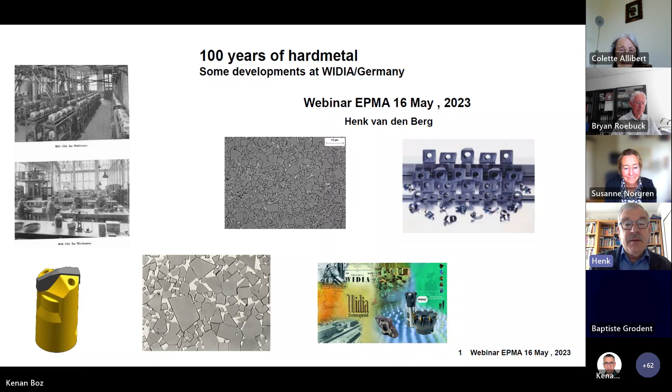It all started, next slide please Ken, with the Karl Schröter patent on March 30th, 1923, which was a common work in the Osram institutes in Berlin. Also, Mr. Skaupy was involved. That name will come back a couple of times.

And after using this material in drawing dies for making filaments, it seems that Osram was no more interested in doing more research on applications. So Krupp acquired this patent by the end of 1925 and started manufacturing in 1926. You see a first structure of the Widia N, tungsten carbide 6% cobalt grade, which is still today one of the most used compositions.

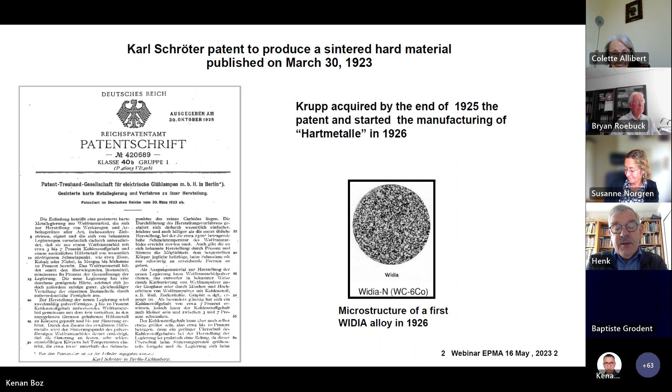And in the next slide please, Ken. Krupp was very good in marketing. Alfred Krupp already had a huge marketing department starting in the 1850s. And Krupp decided the baby should have a very good name.

And from that, the success started. Next slide please. It started all in the basement of the Krupp laboratories, not far away from the production site, which we will see later on.

And it is very interesting that at the same time, the company Walter, Mr. Walter, started production. But looking at the files in the historical archives of Krupp, he had to make an agreement. And it's very funny to see that Walter then, for years in their catalogs, had a special page at the end stating their products are made out of hard metal blanks from Widia.

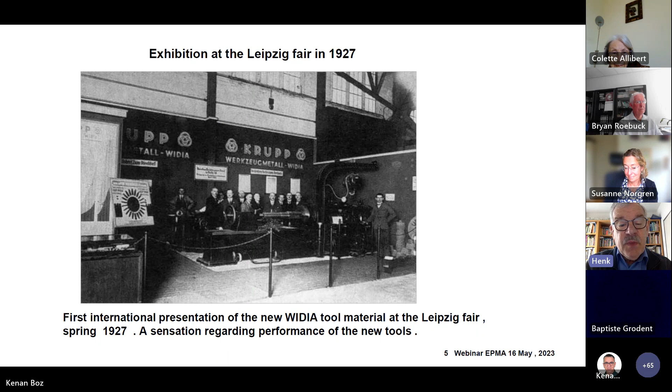Even now today, the application of cemented carbide on the tools, which are of course nowadays quite complicated, the key point is training the people who are at the machine. And that was a success in Germany, especially in Europe, in those days.

When you read the booklet where Dr. Ammann is visiting the United States in the years 1935, 1936 to see why carbide is not having a breakthrough there, it was this kind of untrained people that very, very often meant the cemented carbide tools used in the US were just breaking because the application was done in the wrong way.

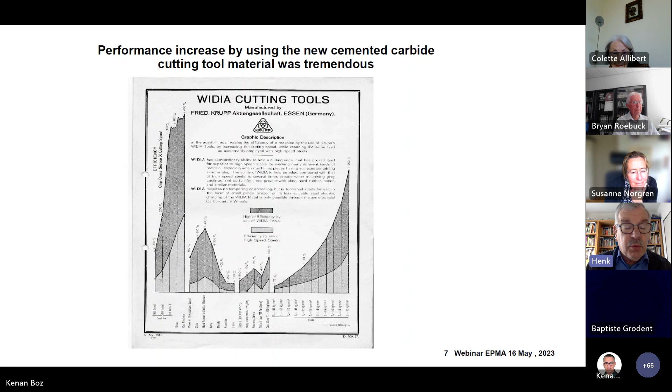Next slide, please. Again, here you see the very, very broad application guides that they gave directly after introducing a new product, a new material. Here the Widia X8, a new grade. And very important, every time in these brochures was the application with pictures, with a layout, how to use it, how to approach the part you want to machine, and even how a machine has to be constructed regarding stability and the clamping of the parts.

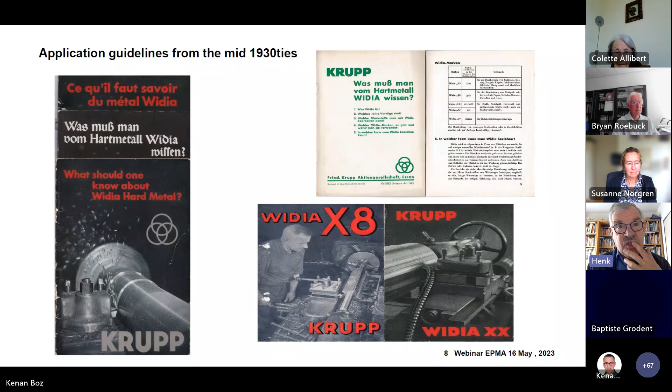The next slide, please. This is quite interesting when we talk about pricing, because it's really a very good business. Although in machining today only 4% of the costs are the cutting tool, the pricing, the usage was from the beginning very, very important.

And it's really amazing that in the mid-30s it was $45 per pound, because it was sold per weight in those days. In the United States, as you can see, it was around $50 per pound in 1928, sold by General Electric under the name Carboloy. Between the 30s and '36 it was $450 per pound. It was amazing what Herbert Ammann saw in those days. And after that, it came back to about $100 per pound. So it was really more expensive in the United States in those days, as they stated, than gold.

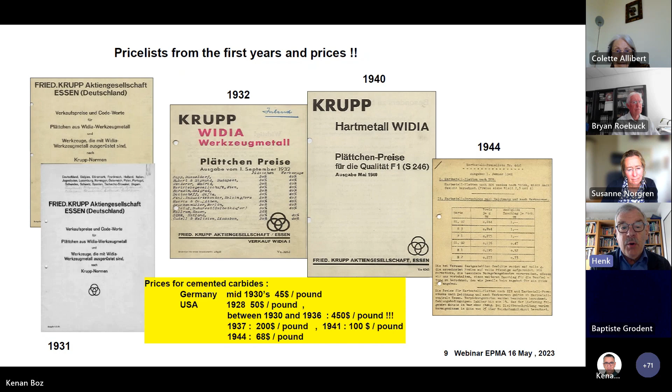But also here you can see again that this pricing, which was done in those days by Krupp and the company Zapp in Düsseldorf, was worldwide done per kilogram, per kilogram. The next slide, please.

This is the picture of the plant in 1934. It was taken from the first handbook of hard metals given in those days, published. In that factory, really the usage and the tonnage was dramatically increased in those days, because the production of hard metal was now really under control, and a lot of licenses were given to other companies. In those early days, it was really worldwide the breakthrough.

Of course, after World War II the production was stopped for one to two years, but very soon it was allowed again from the British council in those days in North Rhine-Westphalia that Widia could restart, but they had to write down - and that is a very interesting booklet, the so-called hard metal Bible - where Mr. Skaupy had to tell everything, how to make hard metal, all the grades, all the machines, all the equipment written down. After that, of course, the German hard metal industry, but the worldwide hard metal industry, was growing very fast.

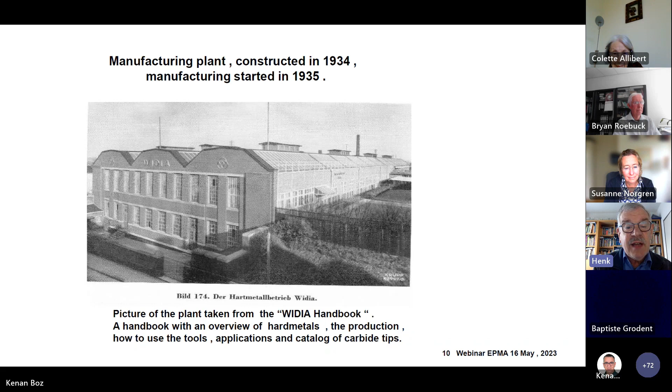And finally, throwaway tips were introduced in the 50s, as I said. But Widia pushed very hard and said, well, we do not throw away our inserts, and the name was changed to indexable inserts.

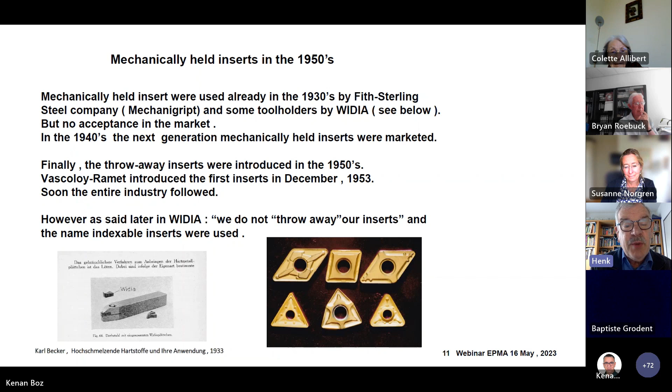The next breakthrough came in the 1960s, mid-60s. The first announcements were made in Werkstatt und Betrieb by Professor Rüdiger. However, this was a heat treatment of cemented carbides where a top layer was produced by sintering, which was then called a coating. But the first real coatings came to market in 1969, a simple titanium carbide coating, followed by a titanium carbide titanium nitride coating.

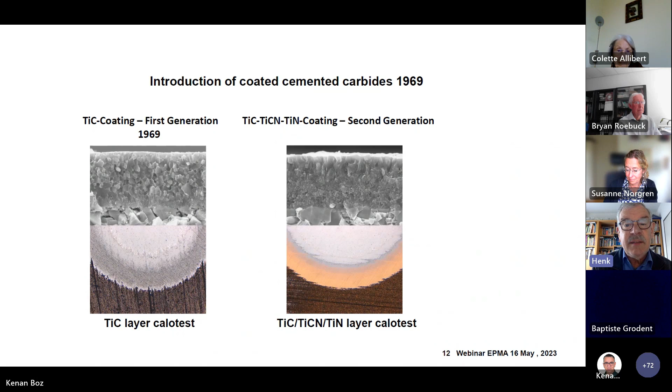The very broad introduction of aluminum oxide coatings was a breakthrough to go to much higher cutting speeds, broadly introduced in those days by Sandvik, with a titanium carbide aluminum oxide coating, followed by multi-layer coatings.

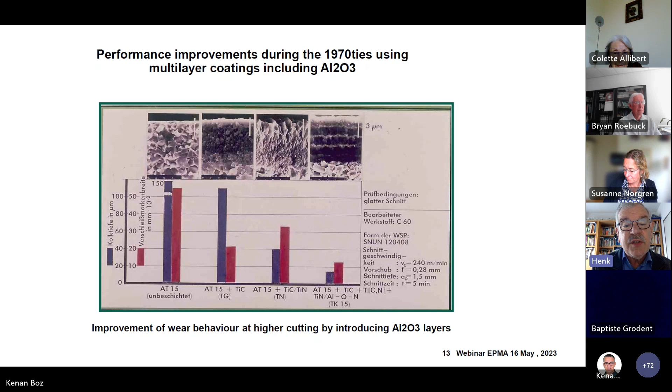Nowadays, the approach is to make a really good performing cutting tool, because we don't sell a coating, we don't sell a hard metal combination, we sell a cutting tool, a cutting edge, in round tools, inserts, or wear parts. It's the substrate, very important. It's the cutting edge, it's the coating, it's the chip breaker geometry, the design, how to lead the chip out of the workpiece being machined.

Later on, in the beginning of the 2000s, 2001, stress was introduced in CVD. It was known from PVD that you have compressive stress, and we also always had tensile stress in coatings, and we found out how to change that by blasting processes, by post-coat treatments. Very important, especially pushed by Sandvik, was the texture management of the aluminum oxide layers, which gives very good improvements in machining performance.

These five components are very important to make a very good cutting tool.

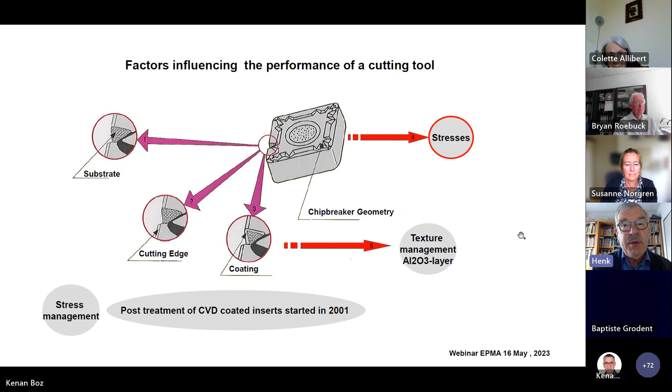Looking to the future, we will have change. It's ongoing already in aerospace and automotive. We go to electro cars, which will of course have an impact on the number of machining components. The introduction of 3D printing will also change machining.

We will have more finishing to finish the 3D parts. We have to use more recycling because resource availability is limited for sustainability. There will be a strong focus, already ongoing, on increasing productivity and optimal application, with optimizations in ceramics, hard metals, geometry, coatings, texture of coatings, and stresses of coatings.

So there is a lot of work to do: improve production technologies like powder processing, pressing, extrusion, sintering, coating, and of course 3D printing. We have to go faster to market.

And of course, very important today, as you can read in every newspaper, in every market, but also in our industry, is the development of better networking to support talent development needed not only in research and development, but also skilled co-workers in production. You really need skilled co-workers to do the sintering and the pressing, etc.

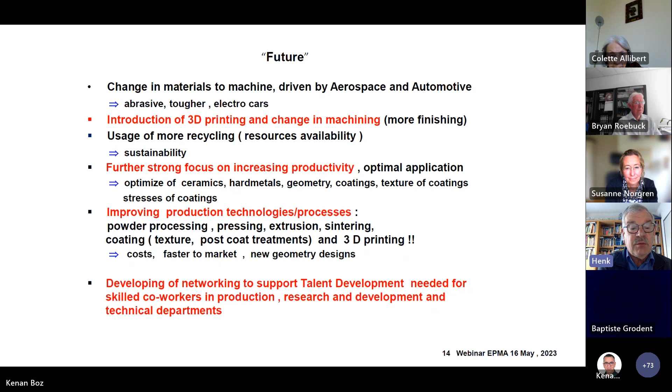An outlook is that our community is very creative and dynamic. As a retired guy, I still follow some developments, and it's really nice to see what is happening and ongoing. The industry gives our community the challenge to improve their productivity through new materials, new machine tool concepts, automatization, and cost-per-part programs.

So the pressure from industry on us will be there, and we should never forget that the industry pays our salaries. Working closely with our customers is essential to understand their needs. Researchers should not sit in an ivory tower, but should really know what is needed outside, as the hard metal community has done over the last 97 years.

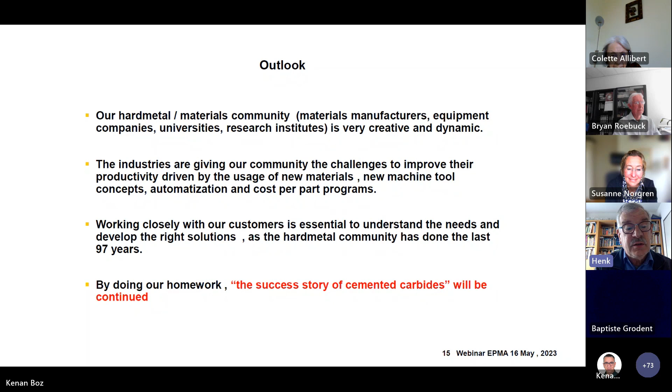I think by doing our homework, the success story of our cemented carbide will continue. The number of tools available today is really great. We always have the target of the ideal cutting tool material. There is a long way to go, but with high temperature alloys, high entropy alloys, and other technologies being used now,

these will further improve performance and give better productivity to our customers. It's really great, and I believe cemented carbides, now 100 years part of this family, will have a very bright future. Thanks for your attention.

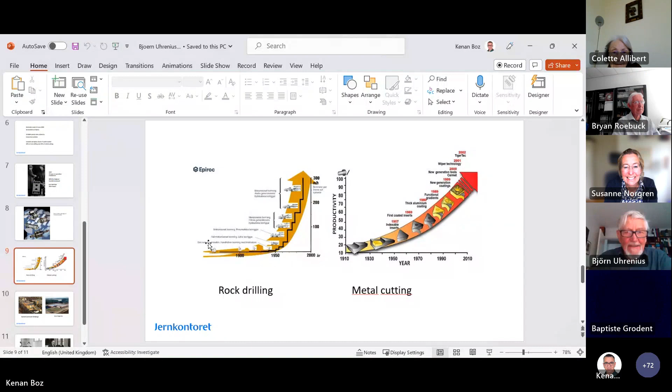I must say that I am honored by you, EPMA, and also by the Swedish group to be a member of this, because I'm since 20 years retired from the business, so my knowledge is outdated maybe to some extent. But anyhow, I was asked to collect a group of scientists and production people who could write about the Swedish history of cemented carbides. And we were all together 17 people who have been contributing to this chapter in the book.

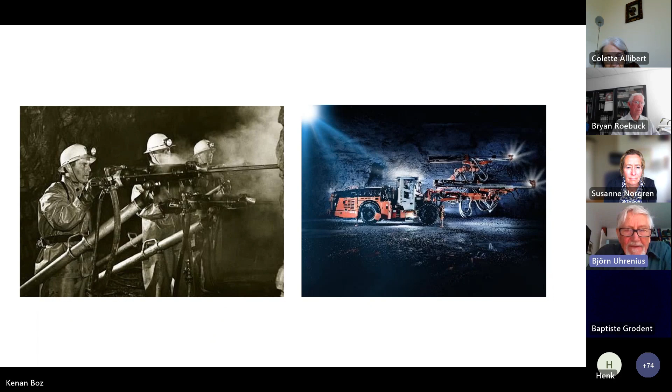And they focused then on the rock drilling business. The rock drilling was successful not only because of the machines, but also the bits you can see here on the picture.

This cooperation lasted for more than 40 years and ceased in 1987, where Atlas Copco wanted to have their own cemented carbide production, and Sandvik then looked for another supplier of machines, forming a cooperation with Finnish Tamrock.

Another important area, as mentioned earlier, is metal cutting. Metal cutting tools was not considered very important in the Sandvik group from the beginning, but due to a strong person, Wilhelm Haglund, head of a part of this business in Sandvik, he convinced the board to go on also in the metal cutting area. Next slide, please.

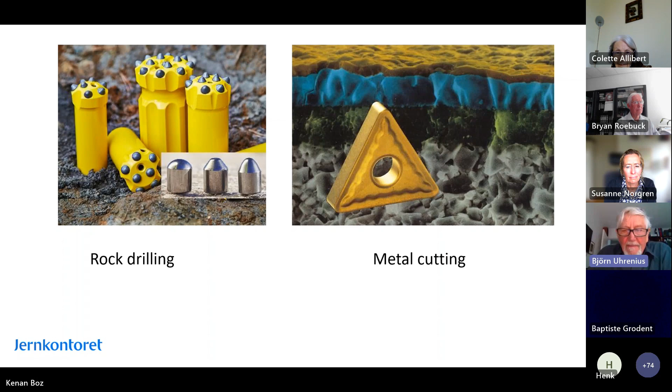So how come that small Sweden could be a major player in this area? Estimates made by the salespeople at Sandvik and Epiroc. Epiroc was later formed by Atlas Copco and Secoroc, which Atlas Copco acquired later. And just a couple of years ago, the rock drilling bits business of Atlas Copco formed a separate company named Epiroc.

So these two companies together had in 2019 about 45 billion Swedish crowns yearly sales related just to the cemented carbide pieces. Estimates were that these companies, mainly in rock drilling, have about 50% of the world market, and a little less in metal cutting. Next slide.

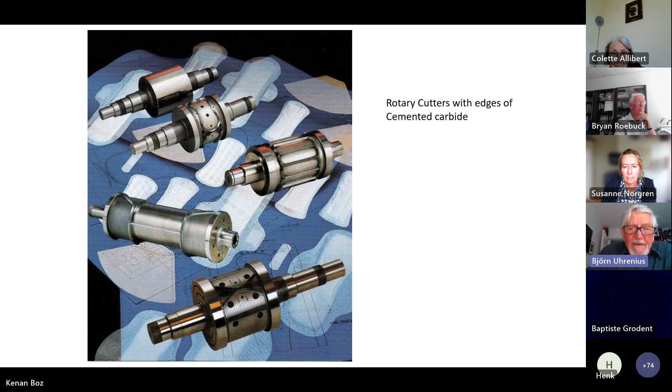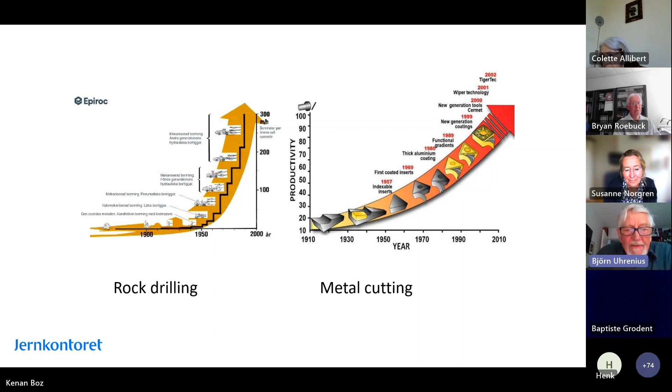And when I first had a short employment there in 1973, I think we were more than 800 people working there, and about 100 researchers. And through the whole history of Sandvik's development is a philosophy...

...formulated in the 1860s by Anders Henrik Göransson, the son of the founder of the Sandvik group. He formulated that we should focus on niche products, we should market through own channels, we should work closely with the customers, and we should develop the products in cooperation with the customers. And that has been successful and is so in the future, I guess.

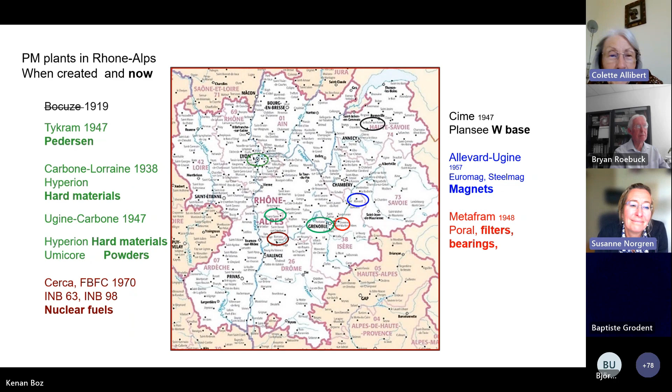Brian. Thank you very much, Colette. Really, really nice to hear. Interesting. And I have a little bit of problem with the sound, I think, but from a personal point of view, of course, I have read your articles on interfaces many, many times. And I also, and likewise, as you mentioned, it's also important to remember the equipment that was needed and also the knowledge about the sintering, for instance. So thank you very much for that. I would say that. And then I also take the opportunity that I would like also to thank both you and the other grand lady who is not with us today, and that is Sylviane Luyckx, because you were really the two front figures, being women in this male-dominated business. So thank you for that.